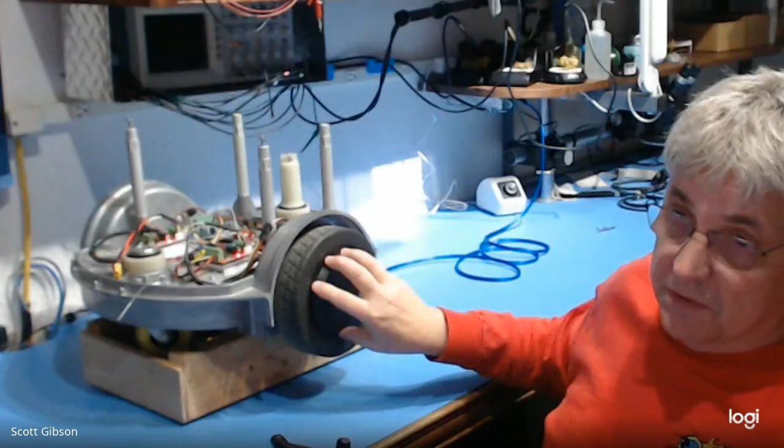So I've been playing around with some different approaches, because since I have two motors, I just have one micro. It's not a closed loop, right? I'm counting on the drives to say, okay, if I wanted to go so fast, it will go so fast. But the problem is this thing's heavy, because you put the battery in it, and this is a big, heavy cast aluminum chassis, probably a good 30, 40 pounds with the motors too, because this whole hub is the motor. There's no linkage, there's a stub that mounts, it's almost like a scooter motor.

Like a hoverboard motor, yeah. They're rated at like 250 watts, so they're decent torque, and they are torquey little things.

I was playing around with the software and had added, I wanted to reverse directions. Instead of reversing directions when the speed was at zero, I cut and pasted to the wrong line, and I reversed directions when the speed was maximum. The whole thing tumbled over and blew up the drive, and it was really pretty ugly.

Because I just had one of these motors mounted to this kind of haphazard rig on my workbench so that I could make it work, and the thing was tumbling all around, and it was pretty violent.

So like I said, I've been able to get it working, kind of. I'm still working on the dynamics so that you could do position control, basically -- not just velocity control, but how do you place it at a given spot and not run past it. I really don't know what the application for it's going to be, because it's kind of big and bulky and heavy for any kind of robot contest, but it's been kind of fun to play with.

I've got this video here. Let me share my screen and I'll show you the video.

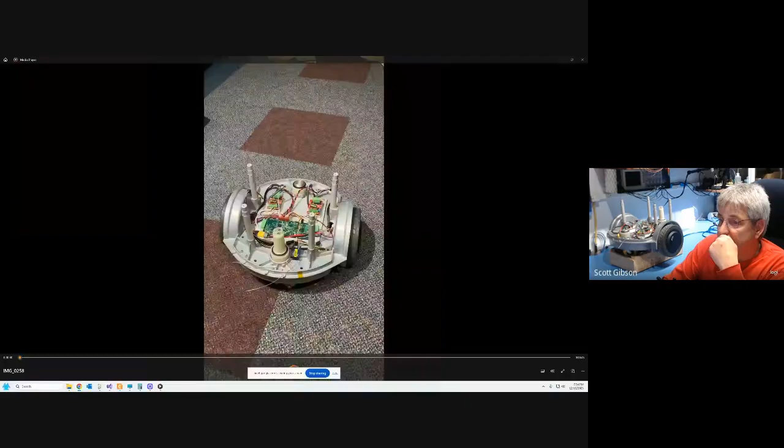Everybody see that? Yep. Yep.

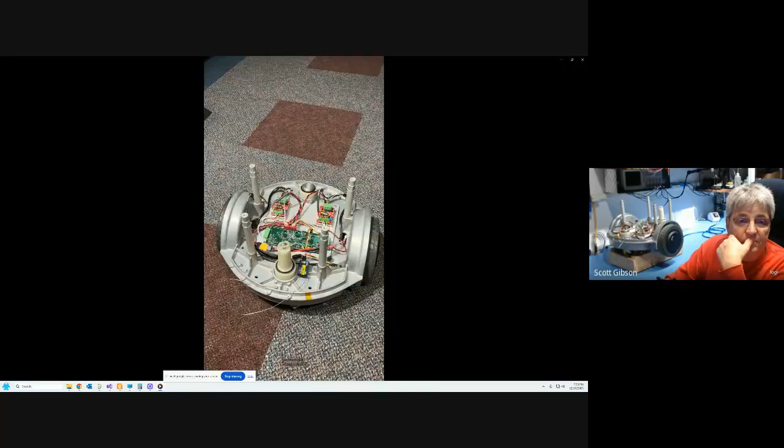All right, so I'm just driving this thing around, just to give you a better look here. I'll stop it right there, and you can see I have a little -- this is just a microcontroller board that I laid out and had laying around, not doing anything. So I modified it, and you can see the two drives here.

They have the Hall effect sensor feedback, and right now I don't have the encoders hooked up. I just have a little RC receiver in here, and my microcontroller is handling it -- it's like SBUS, so all of it's PPM, the pulse position modulated stream. That's how I'm kind of controlling it.

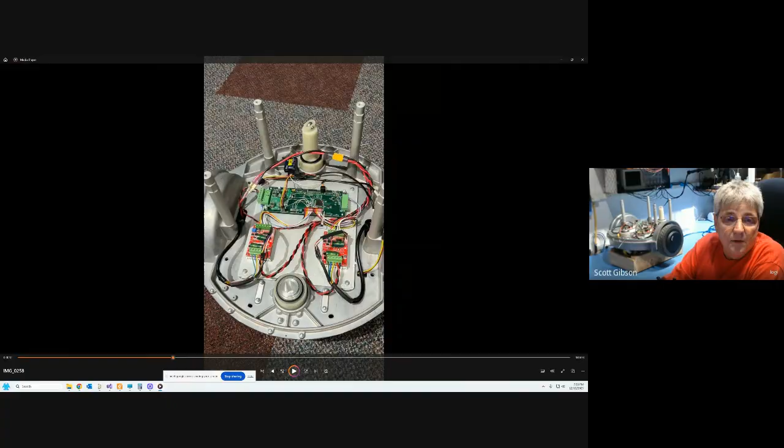So here I am just kind of showing it. Now I'll drive it around a little bit, give you a better look here, and get a better look at the drives and the control board.

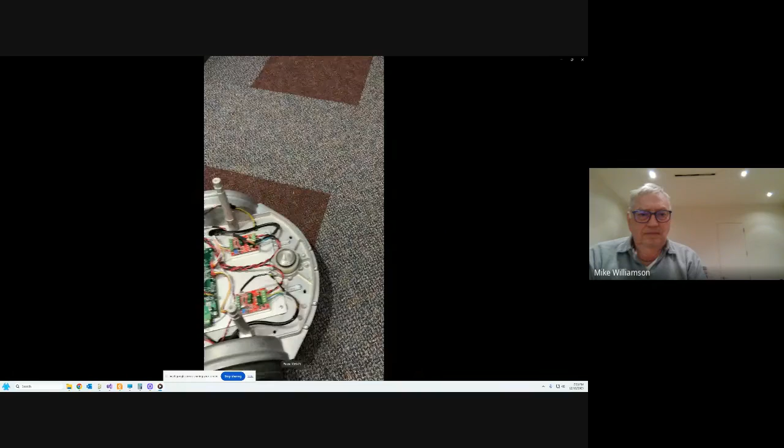Where's the battery? It's underneath, between the wheels under the chassis. Is it 12 volts or 24? It's 24. I used one of those 24 volt cells that the robot guys had, or the lawnmower robots had for sale, which are really nice batteries. They're the lithium iron phosphate ones, the PO4 things.

Like I said, I was brave and actually sat on it and drove it around. I'm glad I didn't take any video because it wasn't a smart thing to do.

That's like an old guy in a hoverboard video, I think. Yeah, but you got to imagine, because I had a piece of plywood across the top, and I had my heels kind of hanging off the edge, so I looked pretty goofy. It was super sketchy because I had the remote in my hand, trying to drive myself around without putting myself on my face or my butt.

Yeah, it was challenging, but it's just kind of fun to play with these wheels and try to figure out what I can do with them.

So yeah, and others, I use those same drives hooked up to two hoverboard motors. They did have three Hall effects for the three different phases. You could get kind of an encoder output, I think it was like 48 pulses, 96 edges. I think there's a circuit where you can tap into it and get it. It's kind of like a magnetic encoder where you get so many pulses per revolution - whatever it is, 6 pulses per revolution with 3 sensors.

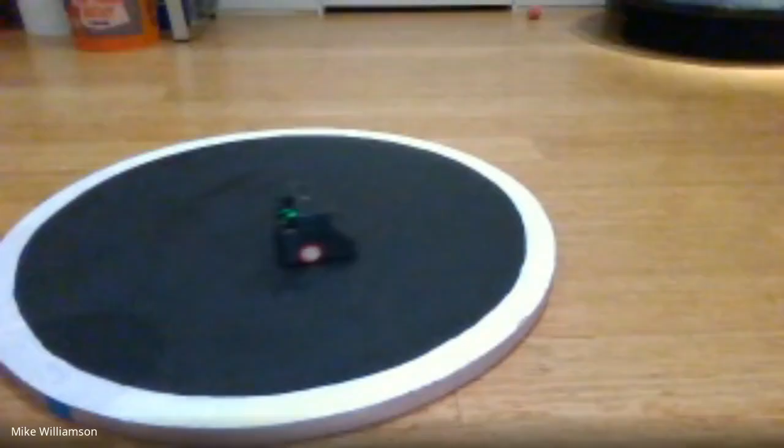3D printed it. Yeah, so my Pololu box has some big Allen wrenches in it, and I put some rubber bands on it to give it some traction. So it's relatively...

Looks like it's doing pretty good. Yeah, so it's ready to go. I mean, and I have it.

I added some code in it today so that if it gets off the mat, it'll stop. So when it measures more than 2 edge sensors, it goes back to idle, and then I can start it again.

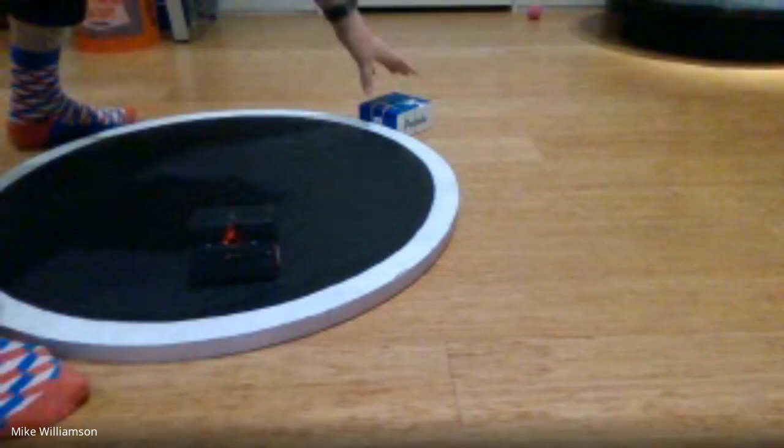See, there's something useful. If you need boxes pushed out of the center of the room, you know. Or go retrieve them from the front door when UPS drops them off. Oh, that's a good idea.

So is that our second star for the night? Scott got, I would say, a black star for progress on his base. And Mike gets a gold star for significant progress on autonomous mode.

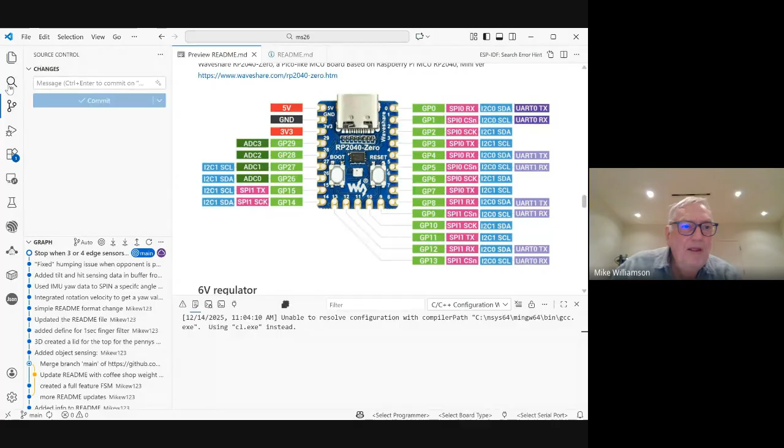Yeah, so this is my RP2040. This is my README file, and basically I've gone through this.

Let me get rid of this whole thing here. So this is the 3D file of it, and one thing I want to do is, I've realized that it's not a good design.

I designed it to have sensors in the back and in the front, but the back sensors are pretty useless, the edge sensors are. And I've noticed that a lot of the mini sumo robots have their wheels all the way to the back, and that allows you, if someone tries to lift you up, to still have traction.

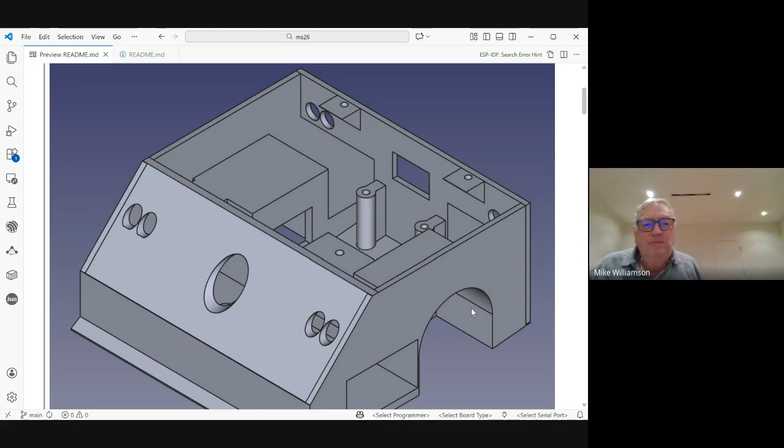So I'm going to redesign it to get rid of the sensors in the back and push the wheels all the way back, and open it up so that someone can try to grab it and lift the front up, and using the IMU to detect the lift and react to it by backing out and doing a big spin, trying to get out of the clutches of whoever's trying to do that.

And this is my... my battery is in this hole here, and it gives me a lot of weight. And one thing I did do, and I don't have it in here yet, can you see on my regular window? I added a top here, and it's full of pennies to bring me to 1 pound, to 500 grams.

You lift it higher, towards the camera? Oh, okay, yeah. And so the top here is full of pennies in there. I guess you can see some shiny pennies in there.

So I noticed that it gives it lots more traction, because it was like at 250 and now it's about 500, and now it can push the box around with lots of rubber bands on it.

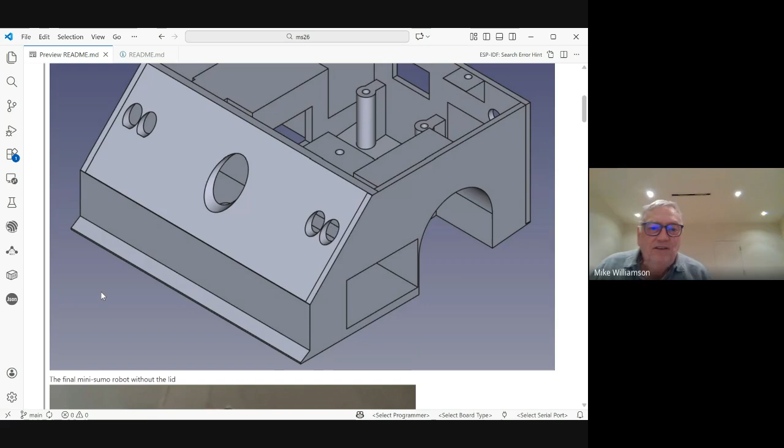This is it with the top open, and all the sensors are connected with these cables, and then these are the two motor drivers here. So you can see here that the motors are mounted here. These are the motor clamps, and that's the back of the motors with their wires. And then these are the sensors here on the back.

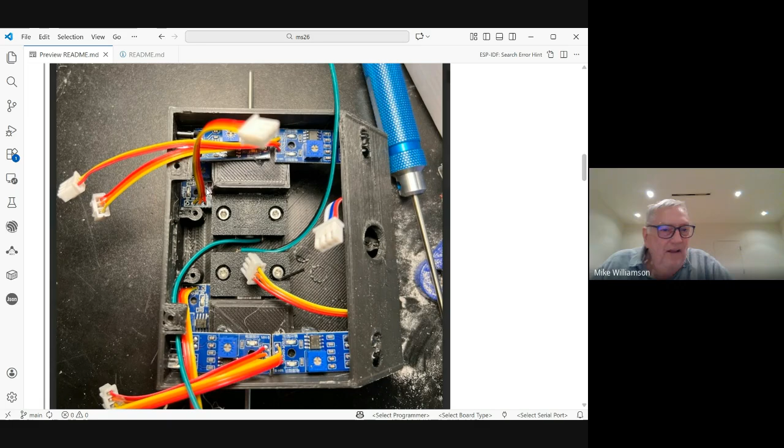So I'm gonna get rid of all the sensors and just push the motors all the way to the back. And that'll give me some, it'll allow me to do extra stuff, like it'll allow me to have it lifted up and then detect it and get out of the range. Right now, if they lift it up, it'll hit the bottom here, and the wheels will be off the ground. That's a really bad design.

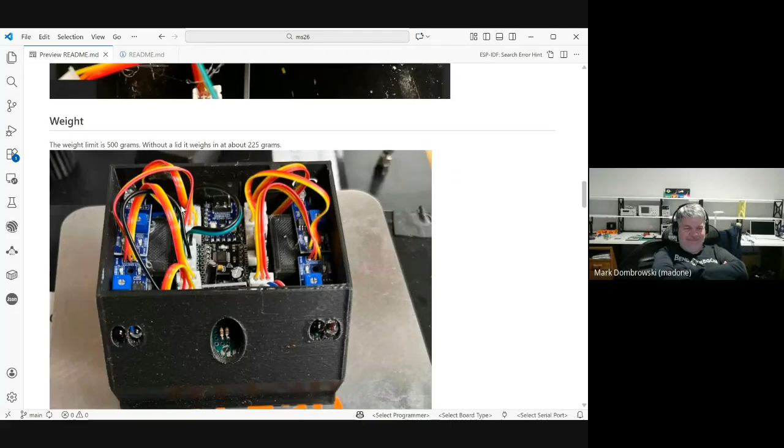But you may benefit too from moving the pennies lower, right? Having a lower center of gravity. Yeah, my box is full. But if I move it back, I can add some more weight down lower. So right now the battery's here and the battery compartment would go back, and then I could put pennies in front of the battery in the front here.

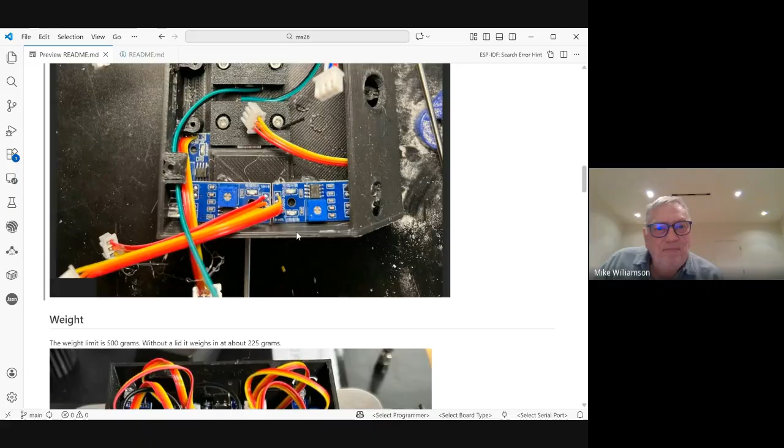So I don't want to redesign the circuit board. The circuit board goes all the way to the front with the sensor right here. And I really can't change the shape without redoing the circuit board, and I just don't want to do that. I just want to 3D print a body, because the body is in one piece, so everything fits in there except for these two 3D printed ones in the lid.

Outsource your body to be printed in steel.

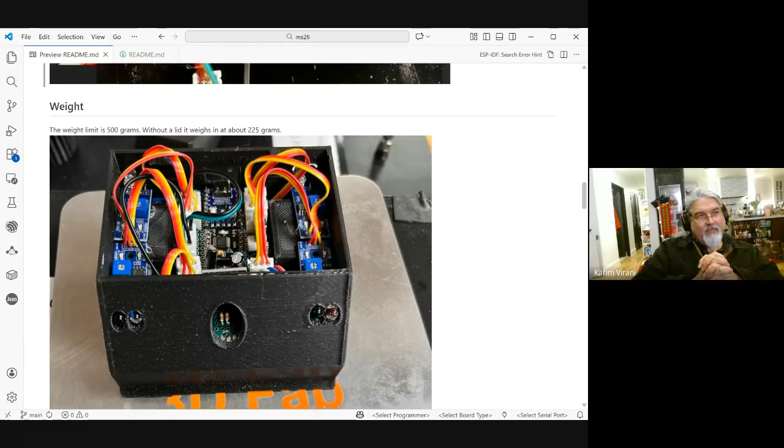I could, but I'm not really super happy with this design. I think it's a decent first shot, and my second shot, moving the wheels back, would be better. If I had a really great design, it'd be okay. Not going to immortalize it in steel.

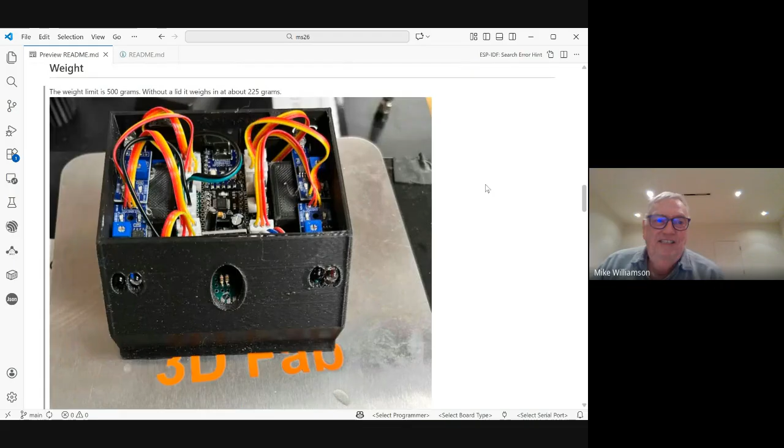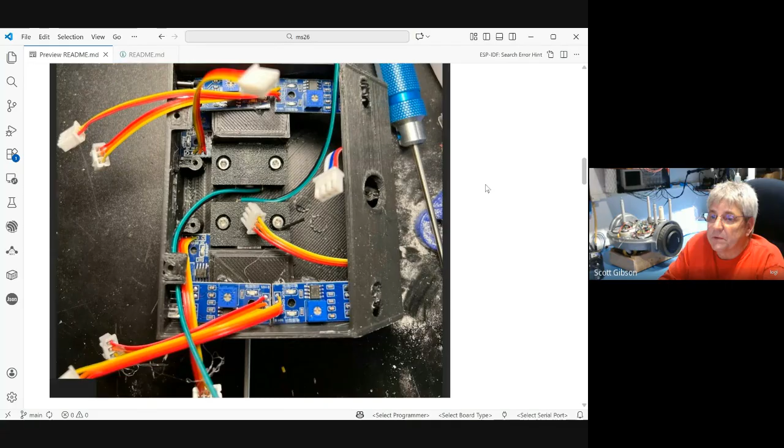Well, I would suggest putting the battery or the pennies under the board, because the board's not going to have a lot of weight. So you'd be able to lower your center of gravity. And if you brought the controller board up? Yeah, I could mount it up higher. Right.

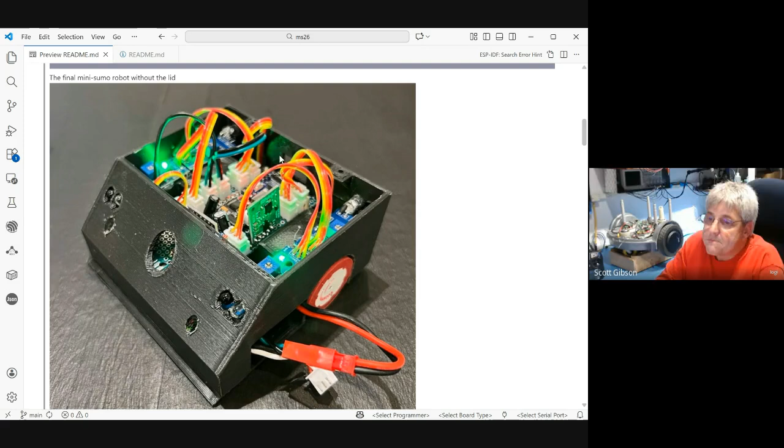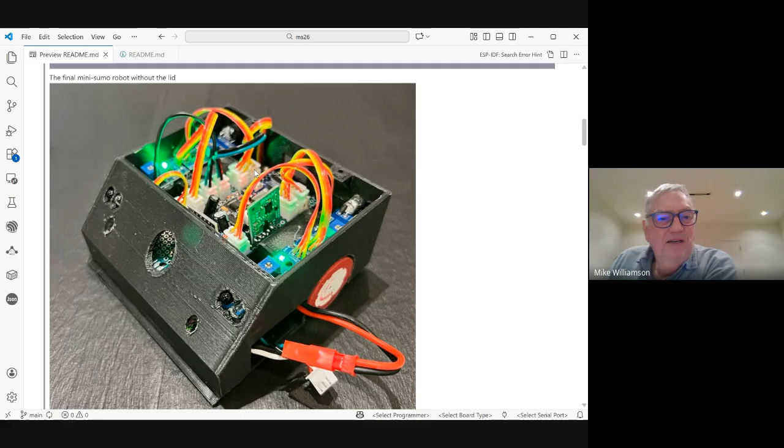Yeah, because right now I was thinking, oh, this is going to be pretty heavy, and then it only weighed 225. So it's like, oh, well, I guess I should have added up all the weights, but yeah, I could somehow raise the board up some more. Fill it up with epoxy. That's not very heavy, but yeah.

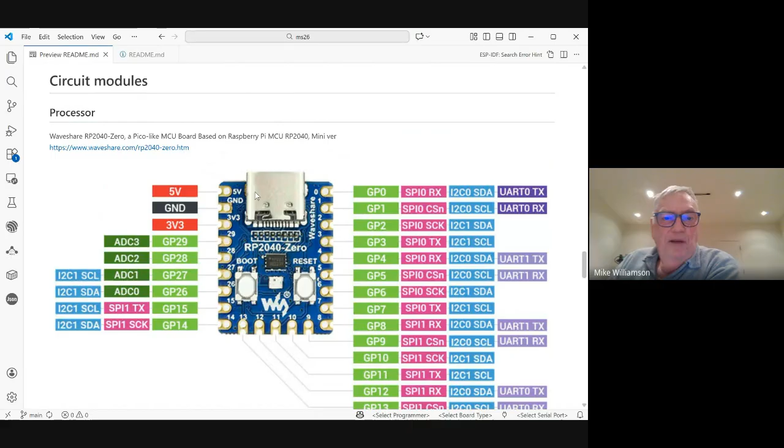So this is the RP2040. I'm using almost all the pins on it. I'm using one of the analog pins to measure the battery voltage. So if the battery voltage gets down too low, like 6.6 volts, which is 3.3 volts per cell, it'll shut off all the regulators and the motor drivers and just be dead in the water. So I'm trying to protect my battery, and it can run for hours because it's a 1,200 milliamp hour battery.

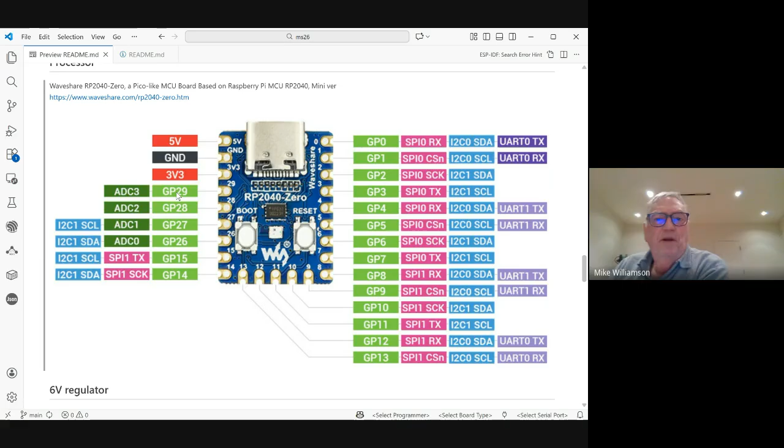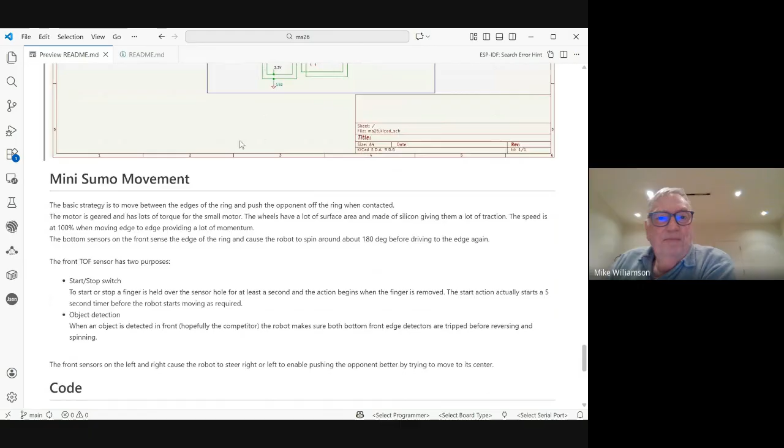So I went in here and added all my components, the regulators, the motor driver sensors, and the circuit board. Then I added some information about my movement and what my sensors do, and a little bit about the code. I've still got more documentation and README to do, but this is a really good starting point. That's my show and tell from last week. I just showed it moving, and today it's actually moving with a purpose.

Well done, very nice. Okay, next up we have Karim.

So mine is just a simple request to the club to visit my new website, check it out, see if it's useful for you. Very selfishly, if any of you have public websites and find it useful, and you would link to it, I would appreciate that. It hasn't even been indexed by Google yet, so it's really hot off the presses, but it's stuff you've seen some of the documentation before. It's all generated from my Google Docs.

Can you put the URL in the chat? Yeah, sure, I was going to show it real quick. That would be good. Why doesn't it want... Oh, there it is. You guys see that? Yes.

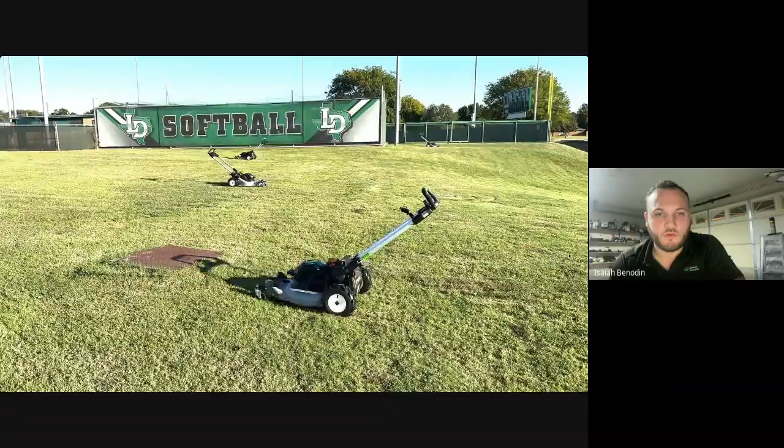Can you guys see that okay? All right, so these are the new mowers that we're running on. We're trying to get some landscapers to run these. I do mostly software, but I helped a lot with the low-level stuff because I've got a hardware background with ESC design. Just thought I'd show you this as an intro.

So is it 100% electric, or is it gas engine driven? It's 100% electric. We actually bought these first push mowers from Lowe's and then converted them to autonomous using the same kind of software and hardware from our first smaller platform that we did with the RoboMo.

Let me see if I can change this. I had a question - it was going right around that steel plate and seemed to be hunting. Do you know what was happening there? Yeah, we have different speed modes, and I think what's happening here is these are still pretty prototype, so we haven't fully tweaked the speeds.

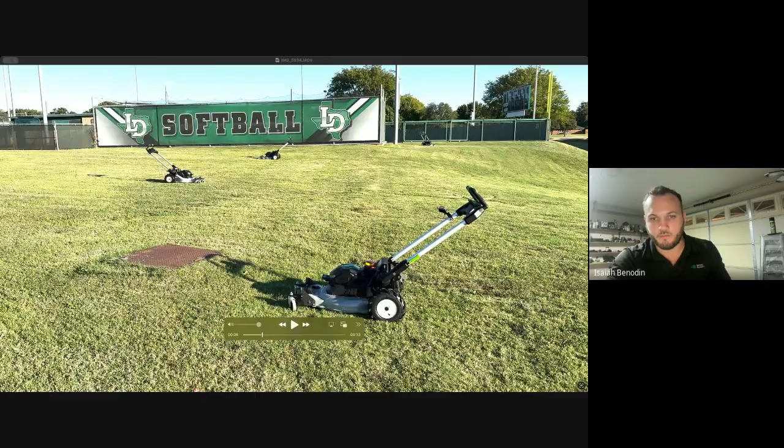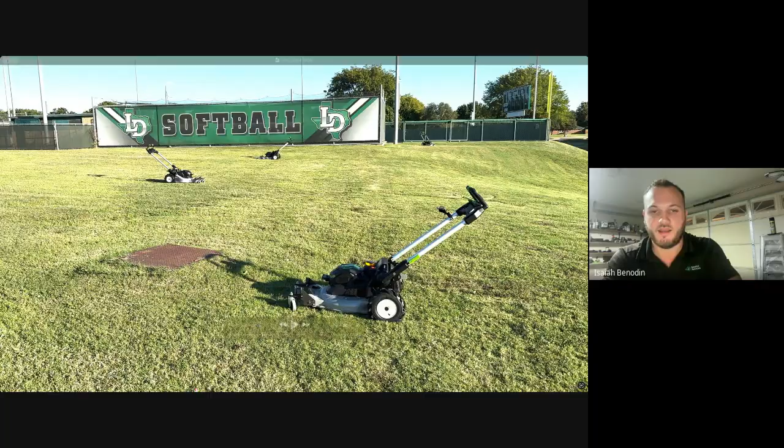When it goes down to too low of a speed, it takes a lot for the mower to turn because they're so heavy, and these decks are aluminum. I don't know if you can see my mouse, but the deck right here is aluminum, so these are pretty heavy mowers. It takes a lot of energy for the robot to turn, and then as soon as it starts turning, it turns too much and starts going back and forth chasing that heading. At higher speeds it's not as much of a problem because it's more consistent - it's just trying to go straight.

I only have a look at the ones going straight, but actually we can look at the ones in the background - they might be doing better because they're not having that issue.

So are those custom drive wheels, or did you get that off the shelf somewhere? These are tiller wheels, and we're using 24-volt wheelchair motors. And those are the wheels that come with the wheelchair motors? No, we had to put those together - we've got a friend of ours who machines an adapter for us to attach to the motor.

Do y'all map these areas, or is this just on-the-fly obstacle avoidance? Yeah, we map the areas out right now, and part of what I'm working on is the on-the-fly obstacle avoidance.

But like for a baseball field, does it make the really cool diamond shapes in the grass - like hatch patterns? Yeah, we do have control over that. We've got a couple different settings, but as soon as we started showing these to people, we hid a lot of those settings because we wanted it to work consistently.

Sorry, I'm trying to find another video here - looking for field testers with tall grass. Yeah, I'm in the yard size range, but we do want to test more.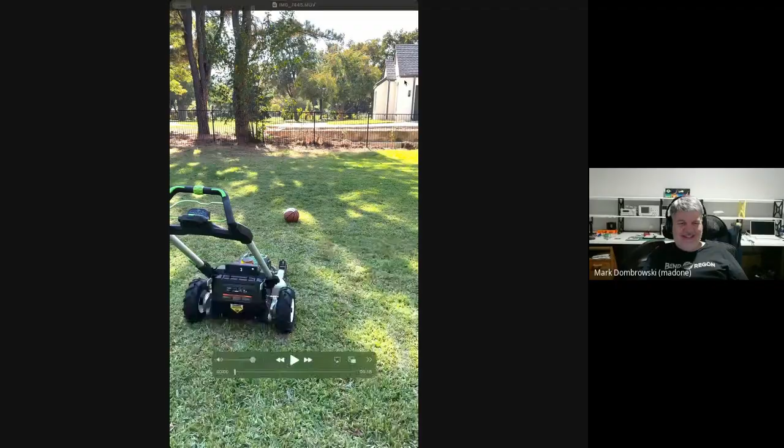Can I turn this off? Dramatically reduced cost unit for testing? No, I've got snow, and some grass under about a foot of snow. Put a snowblower on it. Yeah, exactly, I did that - this is snowblowing the backyard. I've got over an acre of grass you can mow if you want. Yeah, that would be good. We're in Irving, and we do a lot of mowing all around DFW for our testing.

This is an example of it catching the object and then doing a real-time avoidance where we didn't map that out. Is that a 2D LiDAR or a 3D LiDAR? We don't actually use LiDAR. Well, I don't know what you'd classify it as - we use a depth camera to determine the actual distance, but it's not its own LiDAR.

Okay, it looked like something rotating there. Yeah, it's just a safety thing we added so people know if it's on - a really big bright light, like don't come near it. Whenever the robot stops, that light turns off.

But on my own time, I was working on my own robot that does not look nearly as cool. Let me see if I can change that here.

I play a lot of disc golf, and we always have a wagon that we pull with our cooler and our bags and our discs. So I thought it'd be cool to have one that automatically followed me. Did you see? But right now it's me using the keyboard to control this, so it's not automatic.

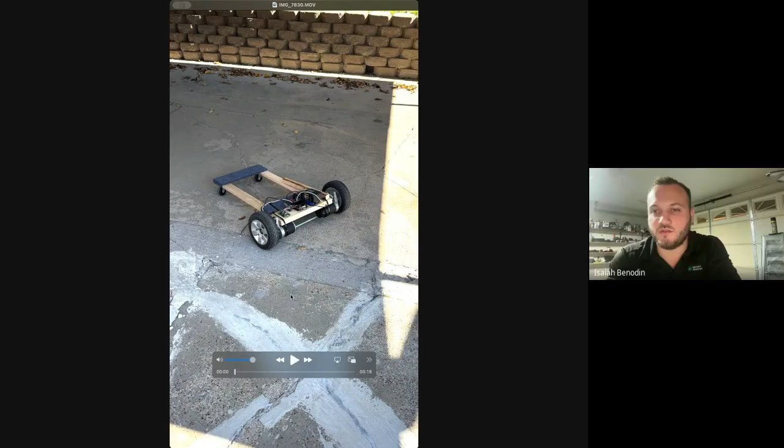Very, very early stage.

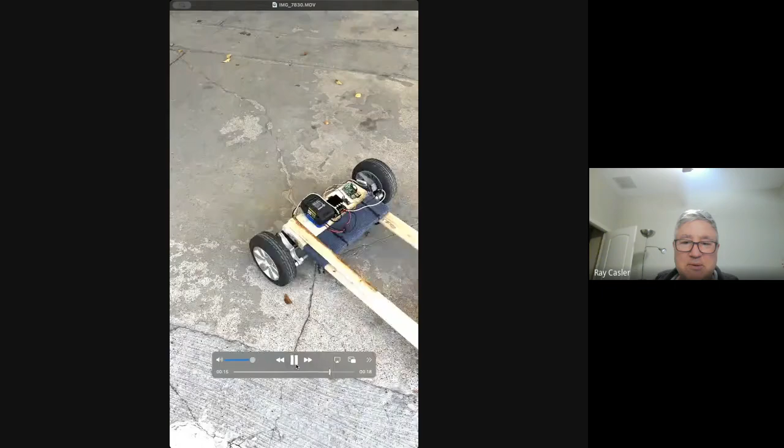You could do blob recognition with a cheap camera, like an ESP32 camera, and have the blob be a certain size so that it stops or goes, depending on how close or far away it is from you. That's a real easy way to do it.

My first thought was just using a webcam I was practicing on, and this is just using a Raspberry Pi, I should say. My motion light always goes off.

This is just using a Raspberry Pi, and it's not quite fast enough for me to do person detection running a YOLO model, because that was my plan. If it can detect a person and give me a bounding box, then it knows that it's a person, and if it's to the left of the screen, we should move right to keep them centered. If the bounding box area is too big, we can stop, and if it gets too small, speed up. So that was the plan, and I haven't gotten to implementing it yet.

When I tested it out on the Pi, it was only able to read a person about once a second, and I think that would be too slow for it to catch on.

I have it here, but this is the one I couldn't get running. Let me stop sharing my screen. This is it right here.

Yeah, I like the furniture casters, the dollies. Well, this was because when I first built it, the plan was to attach it to my wagon, and then when I turned it on, it kind of looked like a hoverboard, and the whole electronics started spinning. The wheels didn't spin, so I need to put something on the front to keep it from spinning itself.

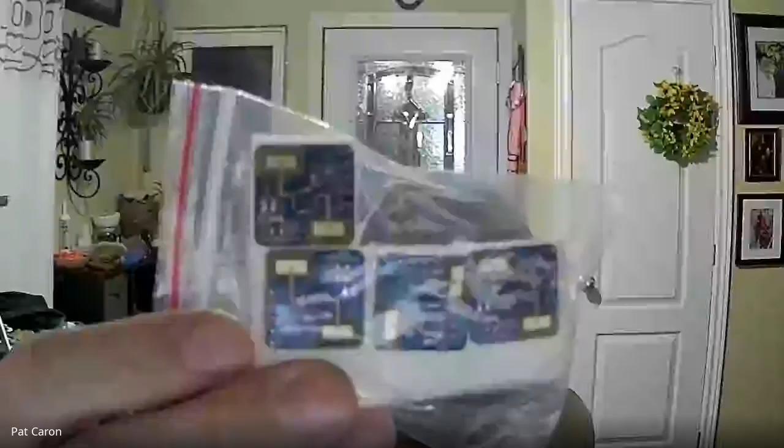I just got from China a little radar, millimeter wave radar. So I put some motion sensors out in the yard - I had some PIR ones, and the problem with PIR sensors is they don't work at all below 0 degrees, 32F, they shut off, basically will not work. They work fine in summer but not in winter. These are rated down to -40, so we'll give them a try with a little ESP32 and see if we can detect motion outside. See if that gets you into the early winter.

Yeah, well, we'll see how it goes. I haven't been doing much with robots. I've been still rebuilding my home network.

I've been trying to get rid of all the surplus computers I've collected over the years. Some of the real junk will get recycled. Some stuff I've been taking pictures of and posting. I posted a couple of motherboards that used to work really well but have sat around too long, a Pentium 1 and a Pentium 2. I thought, well, $5 each, because I don't want people to just throw them in the garbage. So I posted them on Marketplace.

An hour after I posted them, I had gotten 4 inquiries. The next morning, I had 14 more inquiries. I had no idea that really old motherboards were of so much interest. You could have put $10 on it, I could have put $100 on it, apparently. Needless to say, they're gone.

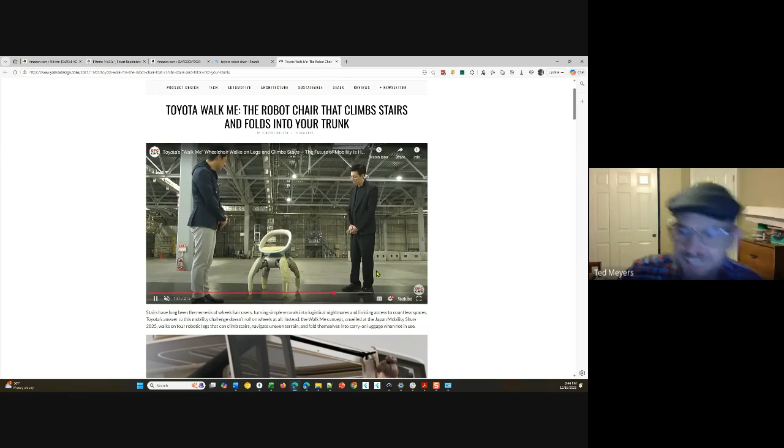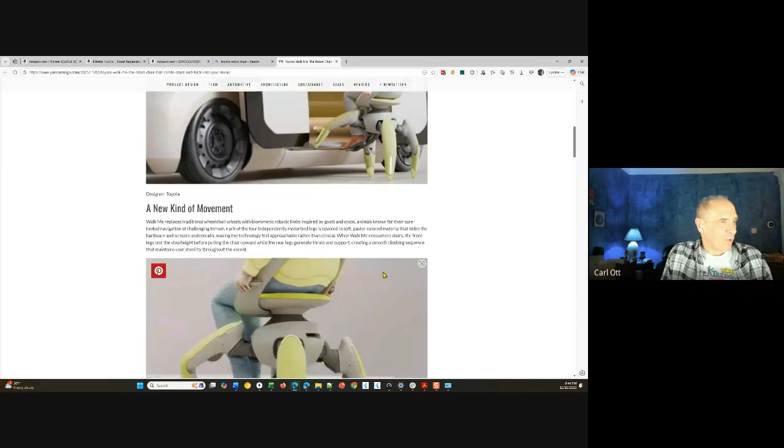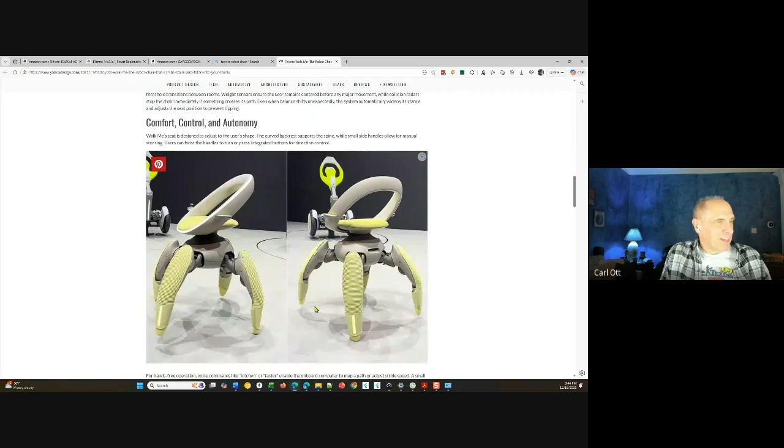Is that coming across all right? Yeah. Somewhere or other they show it getting into cars and then up the stairs. Wonder if it has a prank mode where you go to sit down and it backs up. Yeah, that'd be evil, wouldn't it? Or the auto-sit where it sneaks up behind you and pushes you into its seat. There you go. Anyhow, so there it is, getting you into a vehicle. Of course it's a low vehicle, but it also does stairs apparently. Wow, pretty strong. Talk about emergency room. No concern about it falling over there, right? Yeah, it does look like it has a high center of gravity. Wow.

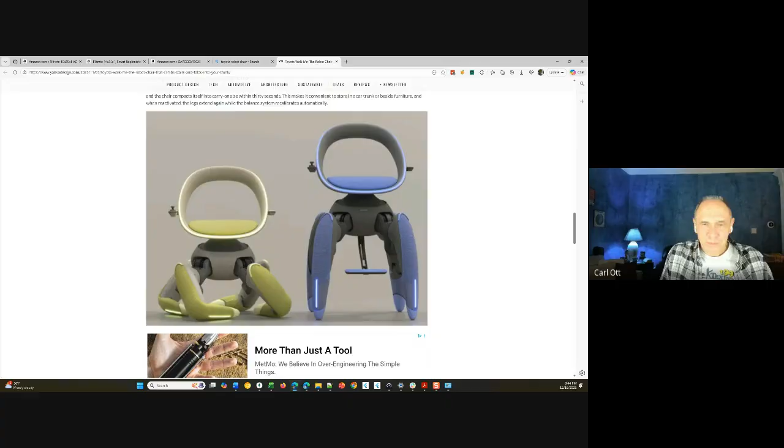So anyhow, I thought that was fun.

Hey, so Pat, can I ask you about those? You mentioned PIR, and then you've got the millimeter wave radar ones. Are they both just like a single cone, or what's their radiation pattern?

I'm not sure about the PIR, I got them out of a box of old alarm system stuff from my dad. The millimeter wave radar I bought on AliExpress, and I posted a link, but I couldn't get the field of view from the site. When I look up the part number, the LD2420, 24 gigahertz, field of view tells me it's approximately plus or minus 60 degrees. I don't know if it's kind of like a main lobe and side lobes, maybe.

Yeah, so it doesn't give much. There's a couple advertisements for it, Walmart, Open eLab, but nothing specific that I see. It seems plus or minus 60 degrees, but it's optimized for motion detection of humans. So there are other models - some of them will detect standing still or very slow moving.